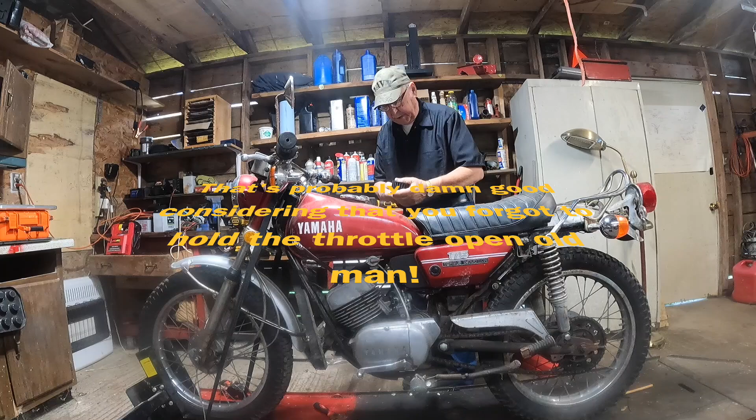And we're going to put the spark plug back in there. And take a look and see if we've got a decent spark.

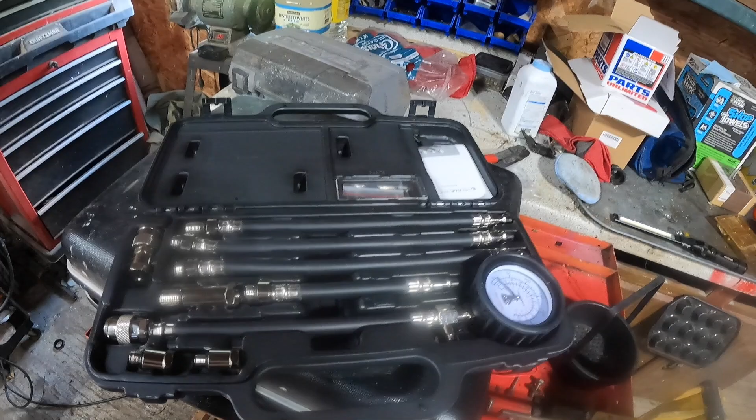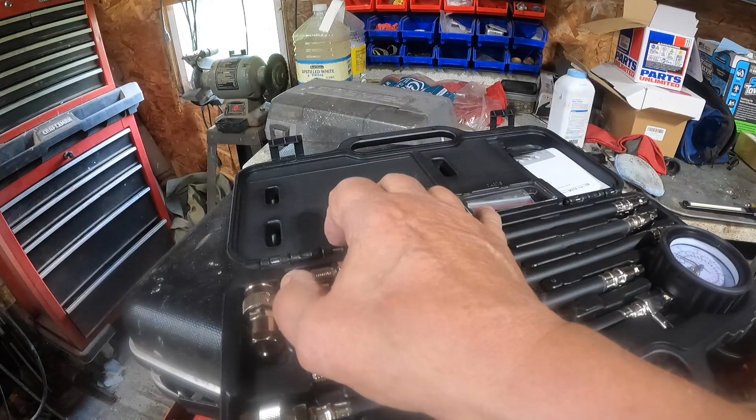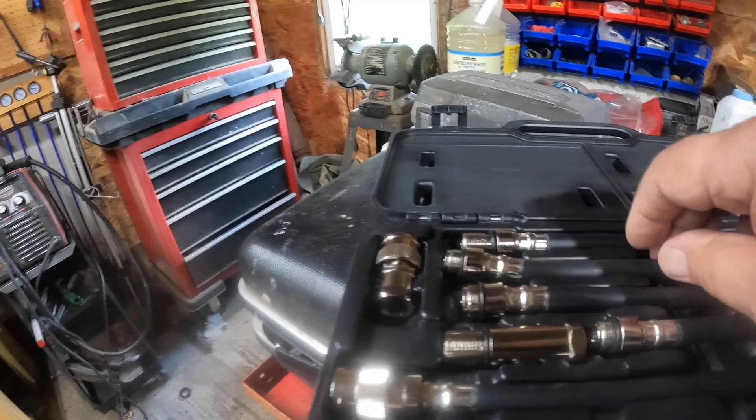I do not like the way this new Mightyvac compression tester is set up, with all these different cables. You got 14 and 18, is it? I'm not sure. I think 14 is what I use mostly. 14 millimeter connectors. You got adapters for little tiny ones. And the good thing is that these, if I can get one out to show you, they have the Schrader valve right down at the bottom.

So instead of the compression going up and expanding the rubber hose and then coming back out, it's locked in there. So you get a truer reading this way. And I just found that out by watching a fellow named James Condon. He was having the same problem with that, with a small engine, a weed whacker.

So anyway, for sure we've got decent compression. And next, we're going to see if we have spark. Let's see if we can get this all zoomed in here. Get a spark plug on it.

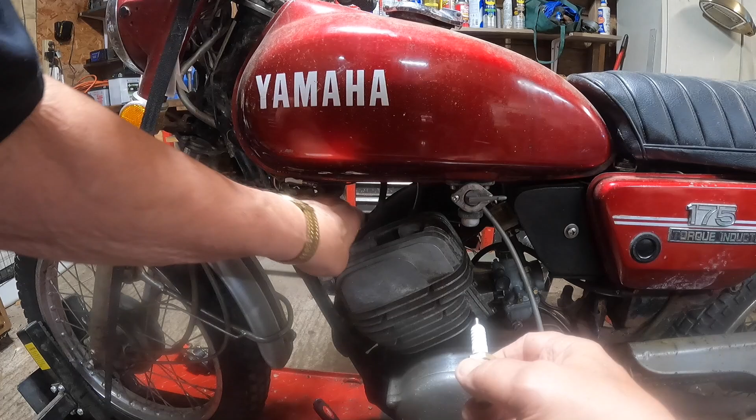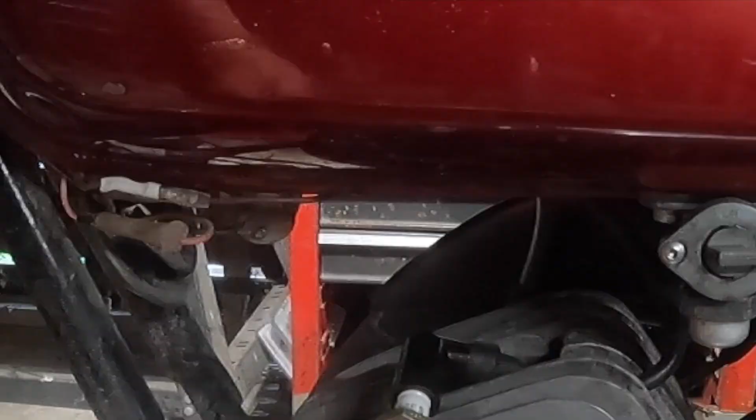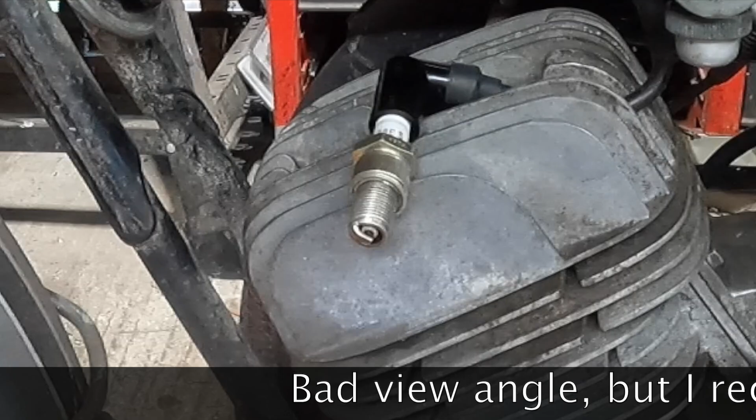Get it grounded out somewhere, and then see if we can get a picture of that. I'm not sure if it will show or not. I hope so. Hopefully we get some sparks out of that. I couldn't see them from where I was.

All right, then the next thing we're going to do is, I could jack this up in the air, but it's hard to kick it once I get it up there. We're going to squirt some gas down the cylinder, put the spark plug back in. I don't think there's much gas left in the tank, but we're going to turn it to reserve.

We'll give it a little bit of choke. It's already choked, huh? Shouldn't need to choke with gas in there, but we'll run it with it anyway. We'll turn the key on. We'll get up here. Well, she wanted to fire. She fired. Didn't keep running. All right, maybe we're flooding it now.

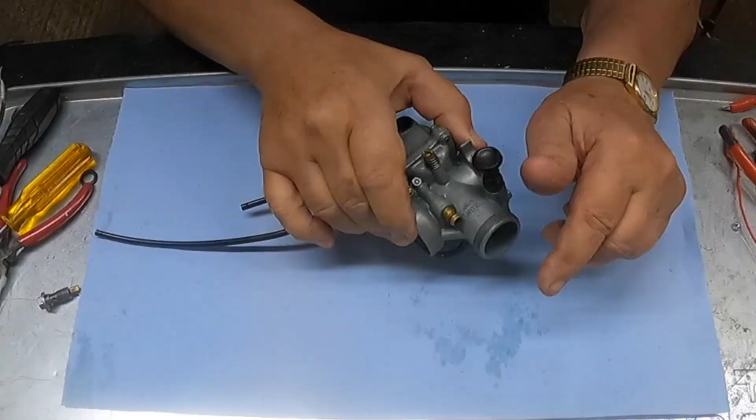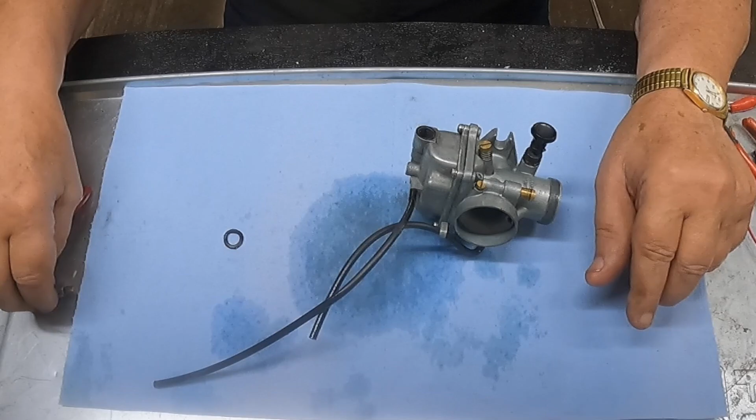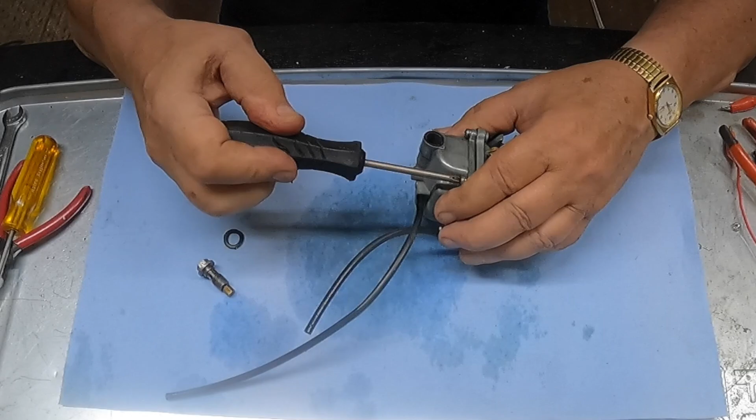Here we have the carburetor. Most of the gas is drained out, but obviously not all of it. All right. Well, the first thing I noticed was when I took the main jet holder out, this was a gasket for it, and that's not a proper gasket for that. So I need to see if I can find a proper gasket for that. But first, let's see what else we might find.

That's on me, by the way, because I'm the last one that had this carburetor apart. So I probably don't have that gasket, or I would have put it in then. But we're going to make sure we got the right one before we put it back together again. Okay. Take that apart, take that rubber hose out of there.

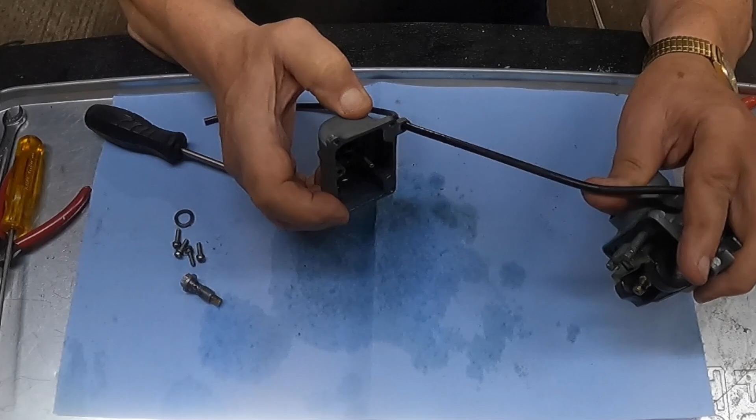Well, this thing has been in pretty bad shape, actually. I don't know if you can see down in there, but it's had some corrosion that has eaten it up a bit. Now, I'm trying to see down in here because this goes down into that hole and there's a little rubber O-ring on here that seals against the walls of this chamber right here. And I'm trying to see if they're corroded as well, and they really don't look it. They appear to be okay.

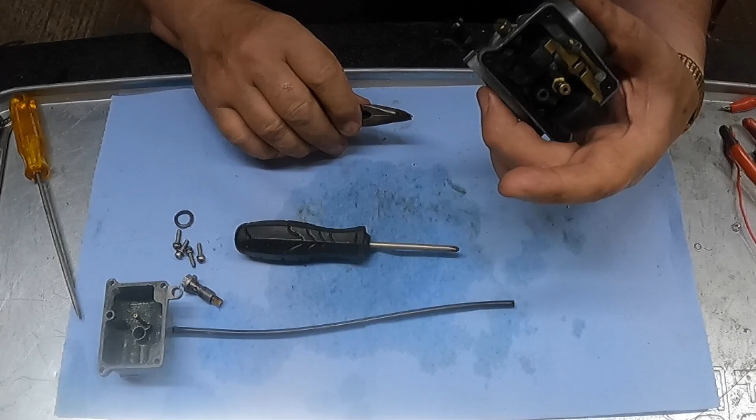So I think this thing should work as long as we have a connection between here and here. So we're going to need to check that out. And we will. Okay. If you look at the, whoa. Actually, that is set wrong. Let me check both sides. Yeah, I need to get the measurement to set that. Make sure that both floats are the same. But that's set to shut off too early. So we're going to have to fix that. Again, that's on me. I did this last.

Needle looks almost new. I don't know if I'll be able to get that out or not. Yep, I think I will. Let me see. Oh yeah. No problem. Usually I have to go get a little 10mm socket to get that out. But we can do that this time. That looks perfectly fine. I don't see anything inside it. Gasket looks good.

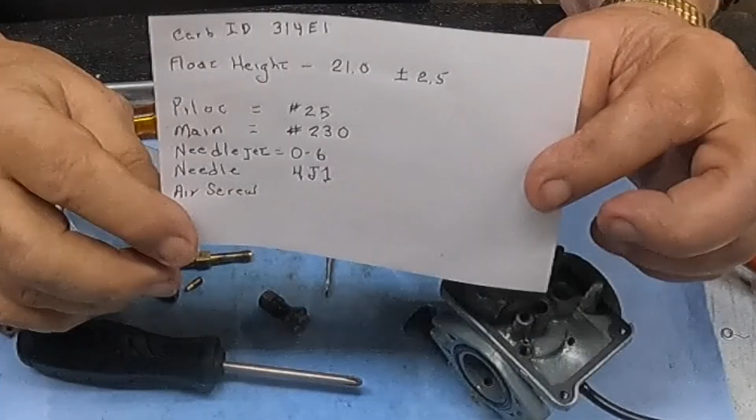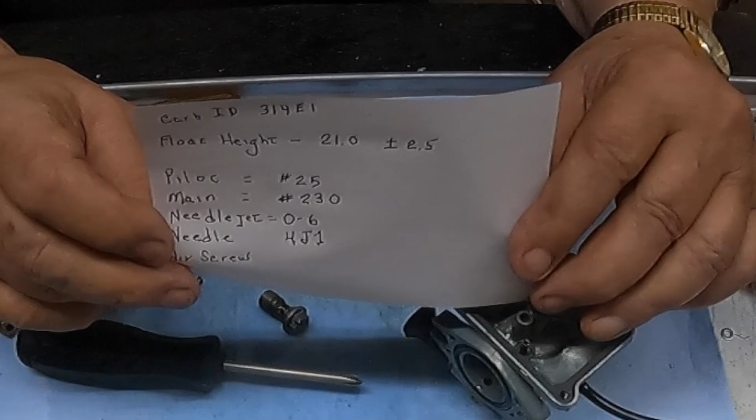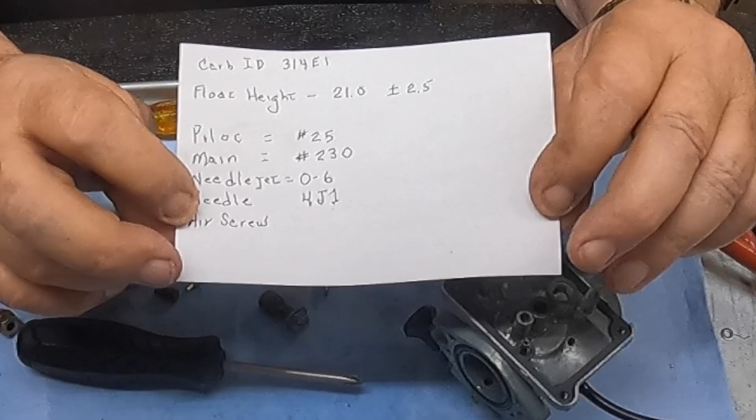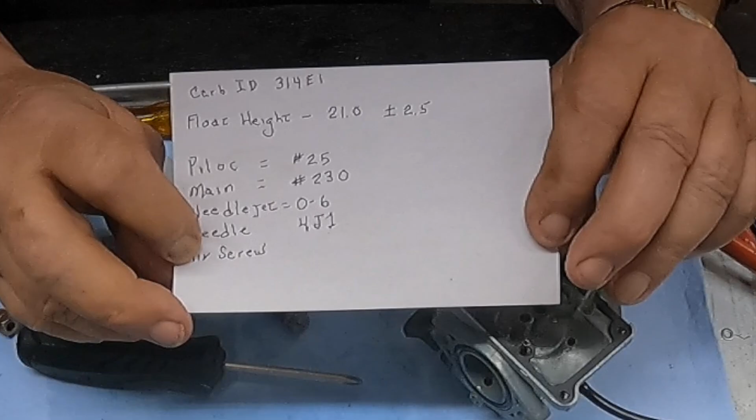All right, so what we got is the float height should be 21, I think. 21 plus or minus 2.5 millimeters. The pilot jet should be a 25. The main jet should be a 230. And the needle jet should be an O-6, which it is. Verified that one anyway. And the needle should be a 4J1 in either 2 or 3 position.

So, let's see if we can identify this pilot jet. I just can't see. The main jet, could it be a 230? No, it's a 200. So I think both of my jets are wrong. I need a 230 and a 25. All right, this is the needle jet, and it's okay.

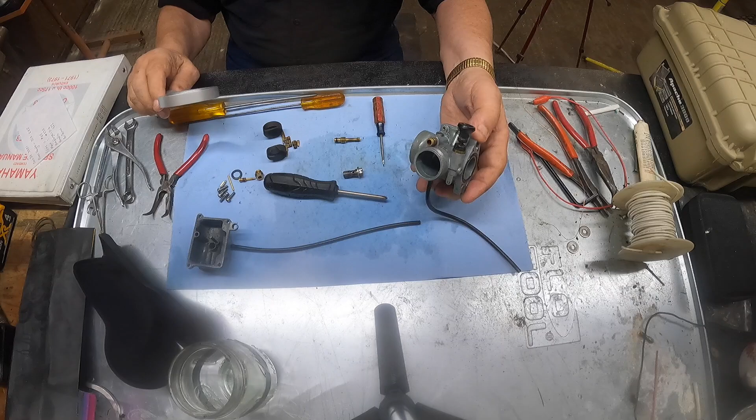The float height was wrong, and the initial setting for the air screw was wrong. Is there a spring in there? And there's no spring in it. Damn, old man. You actually worked on this thing last.

All right, well, I'm going to have to go and get my carburetor box with carburetor parts and see if I can find the proper jets for this thing. A 230 and a 25. And then we got to set the float level. I'll be back.

All right, folks. So I finally found the markings on the pilot jet, and it is correct at 25, but it's plugged. On the main jet, it's incorrect at 200, and it should be a 230, and I don't have a 230. So I did find that I had the gasket for out here, but I also found another bowl that was in much better condition than the one I had. So I swapped the other one into parts, and I'm going to keep this one and use it. I got to make sure the passages are all clean. And I've got a brand new gasket for it, which goes on here. And this is fine.

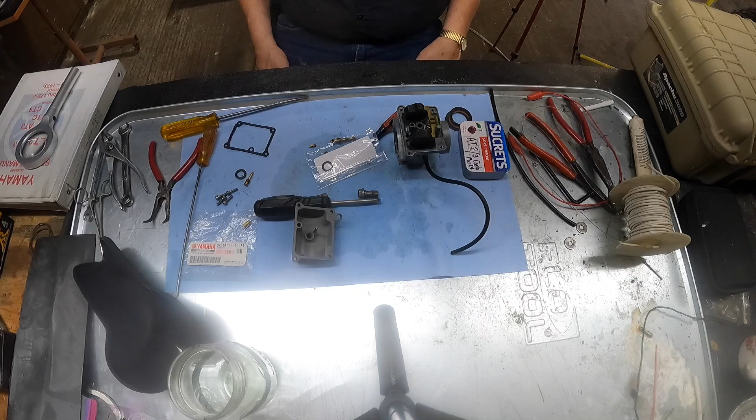So I'll see you when the parts come back in. There are a couple other things I can do in the interim while we're waiting for parts, one of which is to get these float levels set right. So that's in there. Let me get my... Now, what we want to do here, when you're going to set these the proper way, I usually just look at them and see if the supporting arm looks level or parallel to the plane of the gasket area. And when I looked at these, they're not. So we're going to have to do a little bending on that tab on there. But let me get my gauge. We'll set that up.

All right, we want to measure to the gasket surface. And you can see that we're considerably higher than that, and that means that the bowl won't be filled properly. So we need to adjust this little tab up. Now let's see if I can eyeball it and get close. That's still not enough. How's that? Well, that's close. I think that may still be just a hair. Nope, that's right on the money.

Let's check this side. Well, they're a little different. This one's a little higher, but this has got that thing out of it. And that's looking good. It's within 2.5. It's within tolerances. So, we got that set. We've got the main jet on order. We've got the new gasket for the main jet holder. So we're in pretty good shape here, I think. For what, Saturday, hopefully, if they ship them quick.